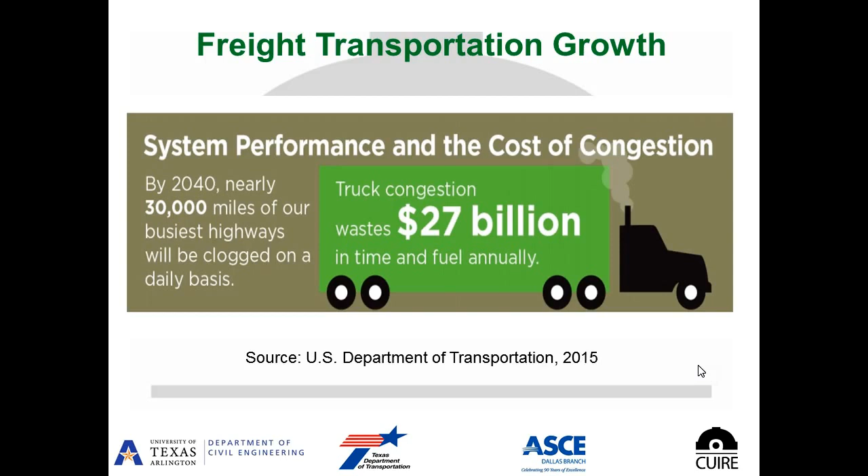Looking at the ports in the US, we have Port of Houston, which is one of the primary ports next to LA and New York. Actually, if you look at the tonnage for the Port of Houston, it exceeds New York and Los Angeles. If you look at the dollar value, Port of Houston is less than the other two. But in any case, it is one of the major ports in the US, and as you know, the cargo comes from Houston to Dallas, and also to Mexico through Highway 35 to the border.

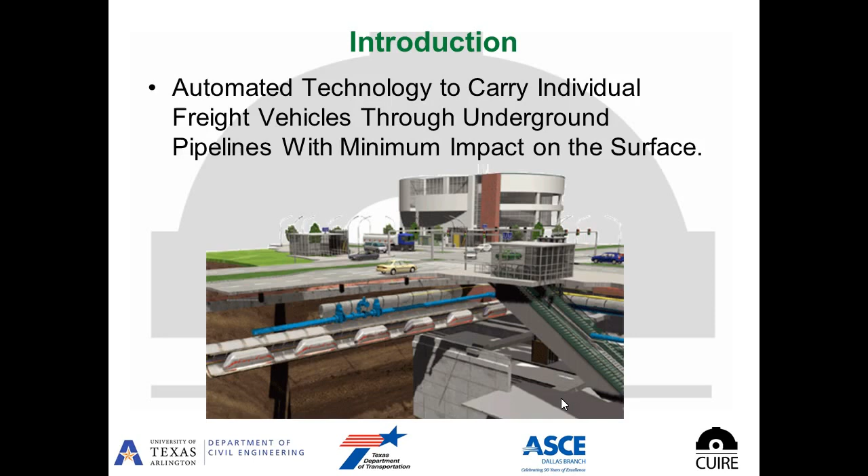So when we talk about underground freight, we are looking at individual vehicles that are automated. They go from intermodal terminals underground, and they ship the freight without any surface disruptions or producing any type of negative impacts. Looking at the intermodal nature of UFT, cargo coming through ports possibly goes through 18-wheeler trucks or maybe train, and then goes inside the city and is distributed by smaller trucks.

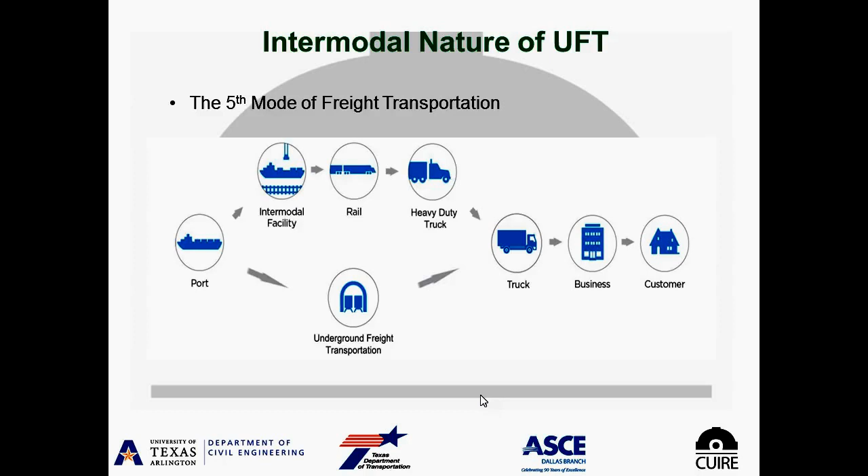What we are proposing is coming from the port, going to underground freight transportation. So we want to reduce as much as possible the 18-wheelers on the highways, and then bring it to the terminals at the cities and distribute it by smaller trucks. This way, it has benefits to the drivers as well. They don't have to be away from their families for a week or 10 days. And on the other hand, we reduce the accidents and other negative impacts of truck delivery.

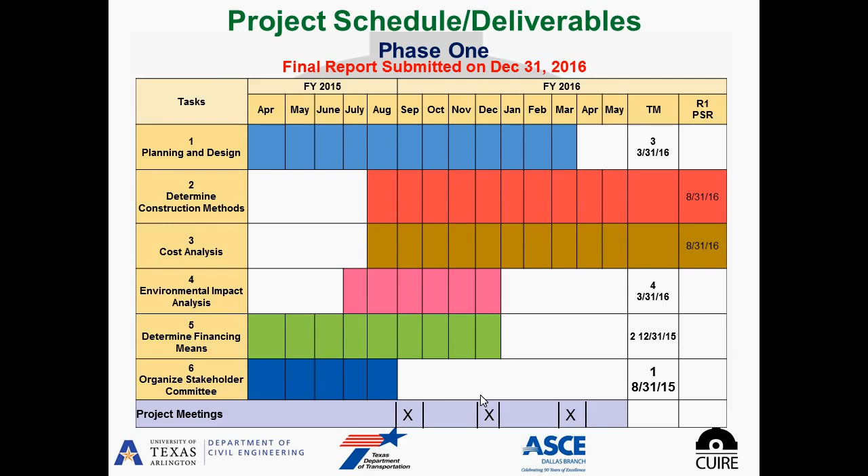So again, looking at UFT design, what we came up with after our research was a tunnel or pipeline, with two tracks, such as railroads, and driverless vehicles that can be three sizes for pallets, containers, and crates. And as you can see, the propulsion system is linear induction motors at the bottom, which is very efficient and uses electricity to move these vehicles.

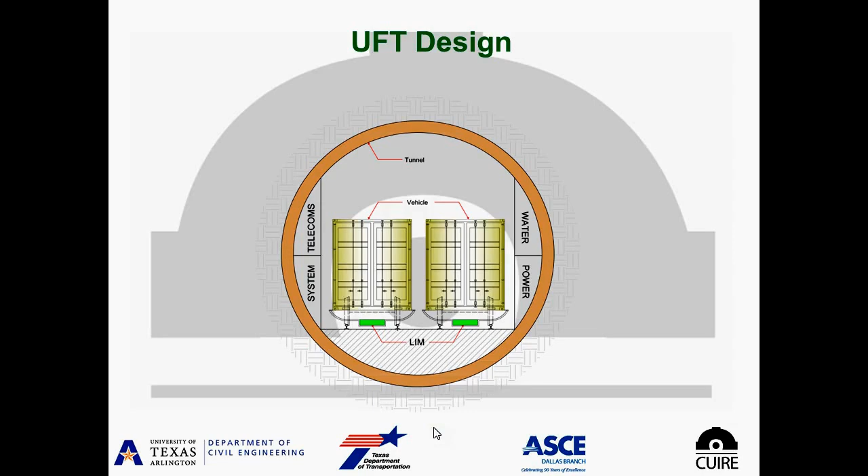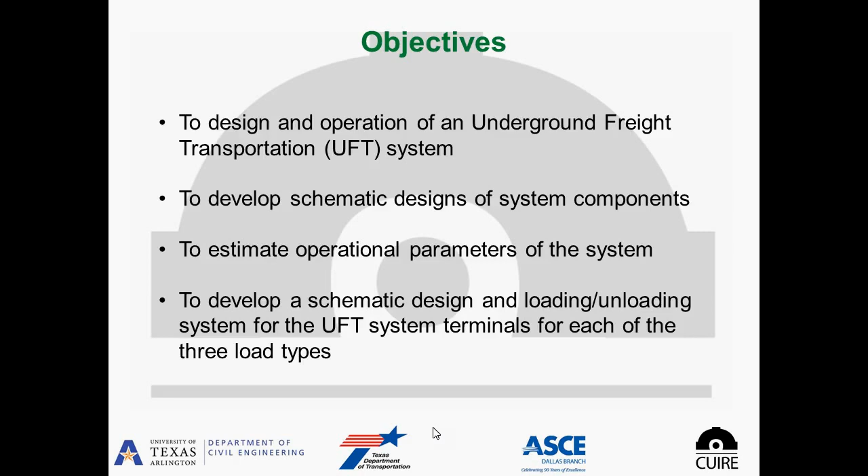So our task one was planning and design. The objective was to come up with a schematic of the vehicles and the tunnels or pipelines. We also developed the design equations for the LIM system in order to provide enough propulsion for the vehicles. So basically we did operational parameters. We calculated the headway capacities, the loads, and the power system requirements. We actually consulted with a LIM engineer in California who helped us do this.

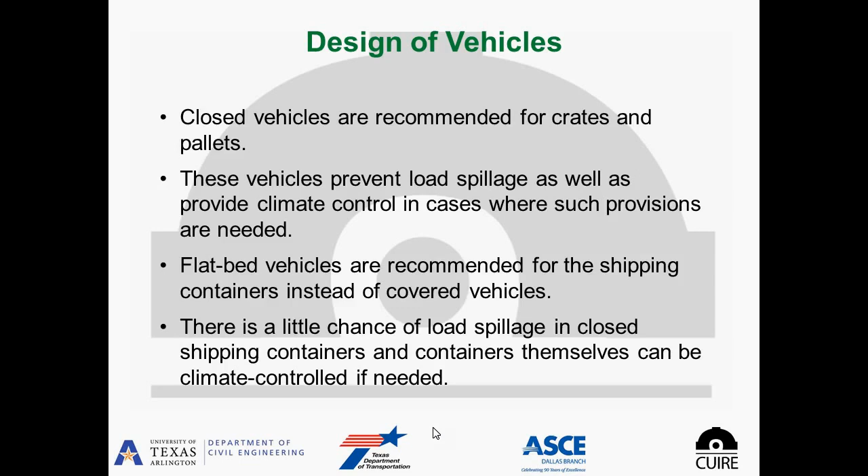So for the design of the vehicles, for crate and pallets we considered capsules. And then for the container size that comes from other countries, we considered just flatbeds or gondolas. So we had two types of vehicles basically, and we considered load spillage and other things for moving the freight.

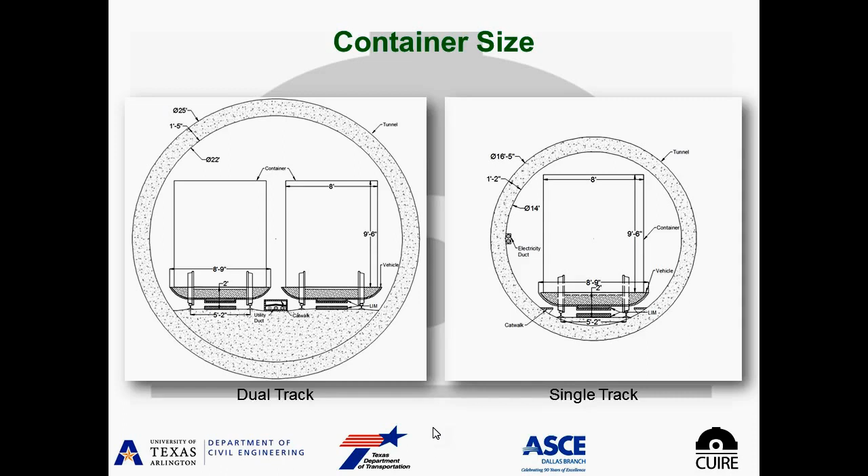As you can see on the slide, on the right-hand side, we considered a single track for two parallel tunnels, and on the left side, we considered dual track. And then we came up with all the measurements and the diameters and the size of the vehicle inside, and then some of the utilities that are required for movement of this freight.

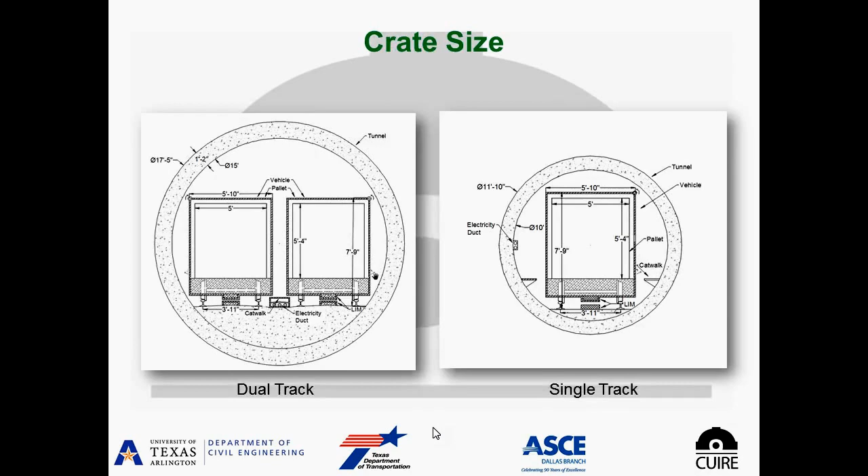So the one I showed you here is the container, or the largest size. Here is the crate, which is the medium size, and again we considered both options. And then the pallet size, which is the smallest size, and again we considered single track and dual track.

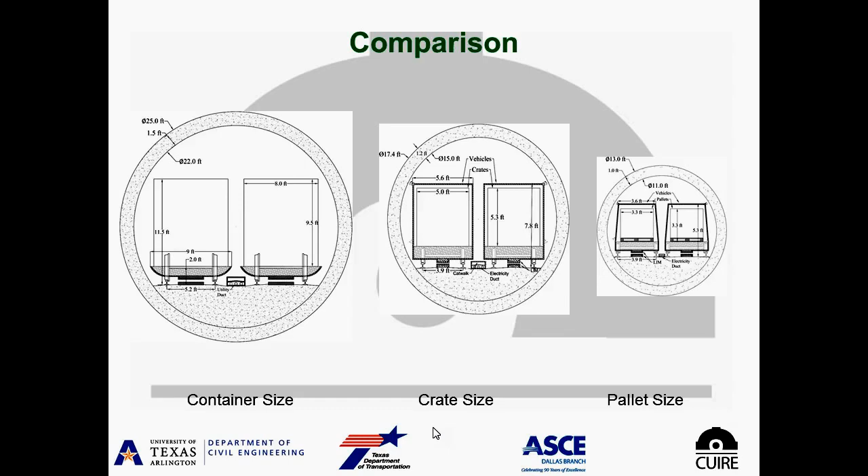Eventually, talking to engineers and contractors, they said if you go dual track for all of them, it would be less costly and more efficient for construction of the tunnel. So for all of them, we considered dual track. So on the right, you can see the pallet, the middle is the crate, and the left is the container size.

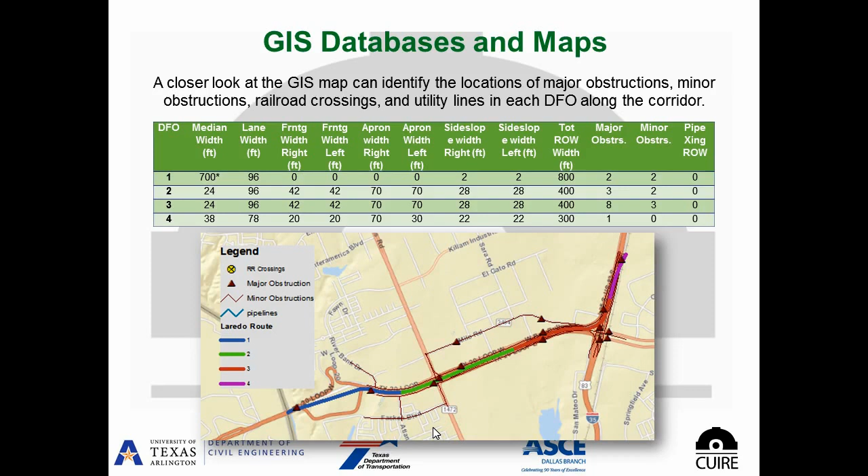We considered the slope. So after talking to the LIM experts, they mentioned that LIM can have a capacity of moving the freight on maybe even a 10%, 15% slope, coming from underground to the terminal. So that's the way we chose, and then we came up with a design for the terminal.

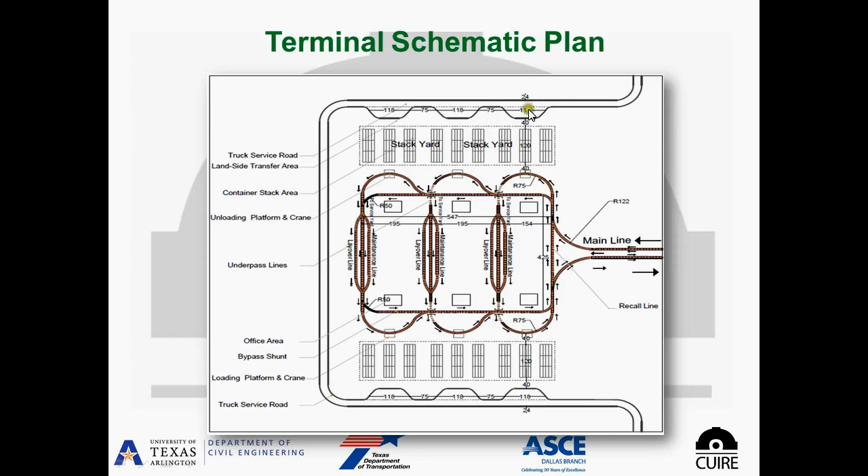As you can see, the vehicles come from the tracks underground, and then come to the terminal, and they can get unloaded, and the freight can be stacked on the side, and eventually the trucks come and pick them up for distribution.

So the results for this task, which is planning and design, are given here, and we considered for Houston to Dallas around 3,000 containers each way can be shipped. And then for the crate and pallet, around 4,300 vehicles can ship the freight.

And then, of course, we need to have a number of forklifts and handlers at the terminals. And you can see the weights, like the container is 34 tons, the crate is 3.5, and the pallet is 2.3.

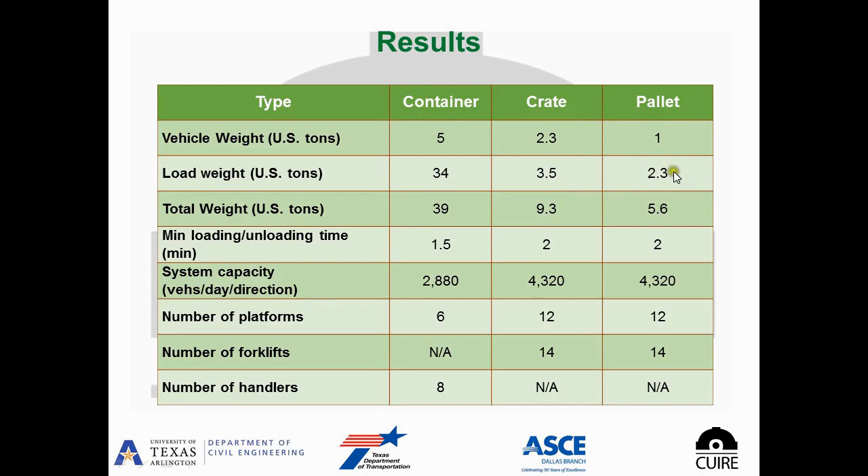So the summary for this task: we considered 3 sizes. Also, we considered a route from Port of Houston to a satellite station outside of the city in Baytown. That was one of the routes we considered. And then another one was the border with Mexico at Laredo. As you know, it is very congested. So we thought maybe the crossing can go through the underground freight.

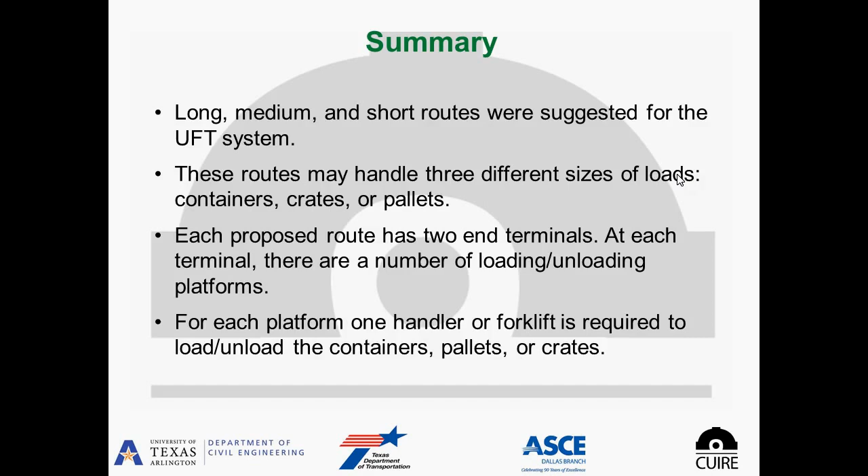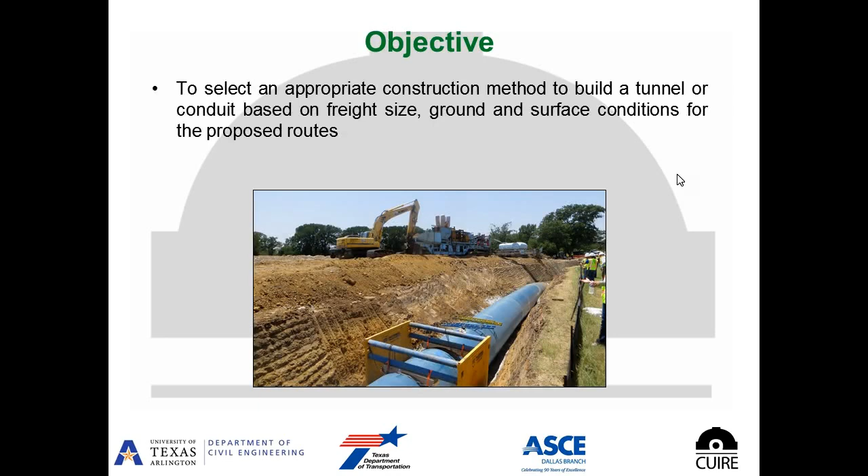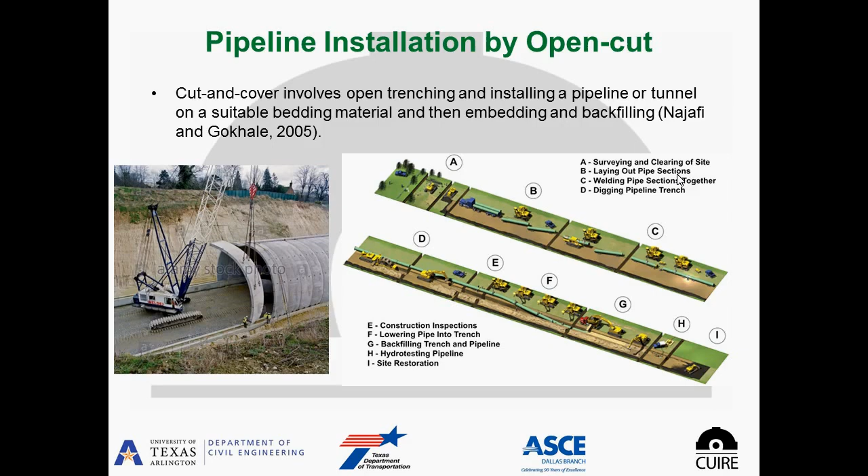So for the construction, we considered open cut or cut and cover, and using pipelines. And also we considered different modes of trenchless and building those tunnels underground. For open cut, we considered the depth from the ground surface to be about 5 feet to top of the pipe, so it's very shallow. But for the tunnel, it is around 50 feet deep.

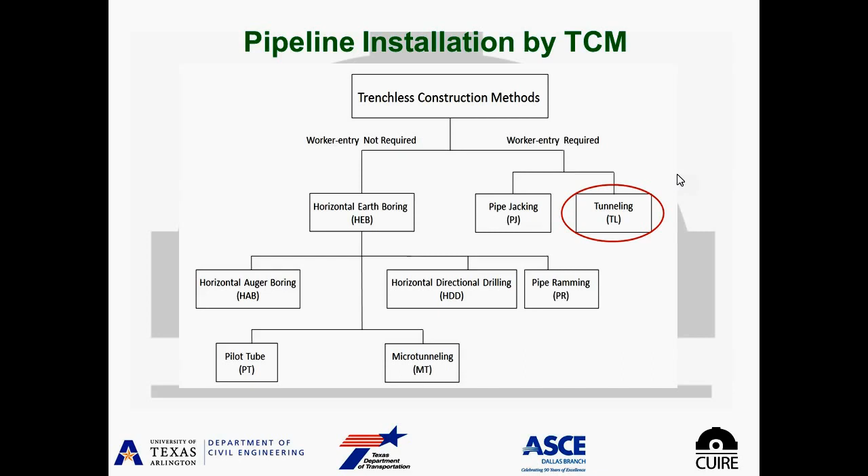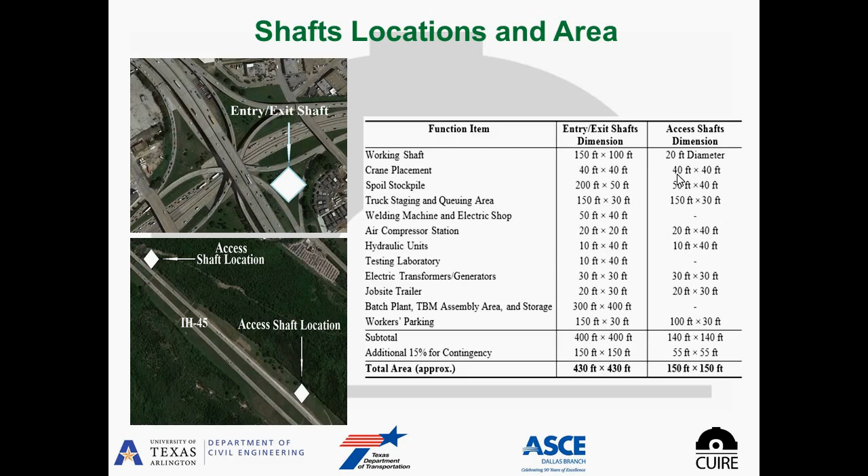As you can see, there are a number of construction methods, and we looked at trenchless technologies and tunneling for the areas where open cut may not be possible. So for tunneling, we considered shaft locations, shaft area, and other factors. As you can see over here, every 1 mile we have an access shaft for the UFT, and then for building the tunnel, maybe about every 10 miles, we have an entry exit shaft for the tunnel construction.

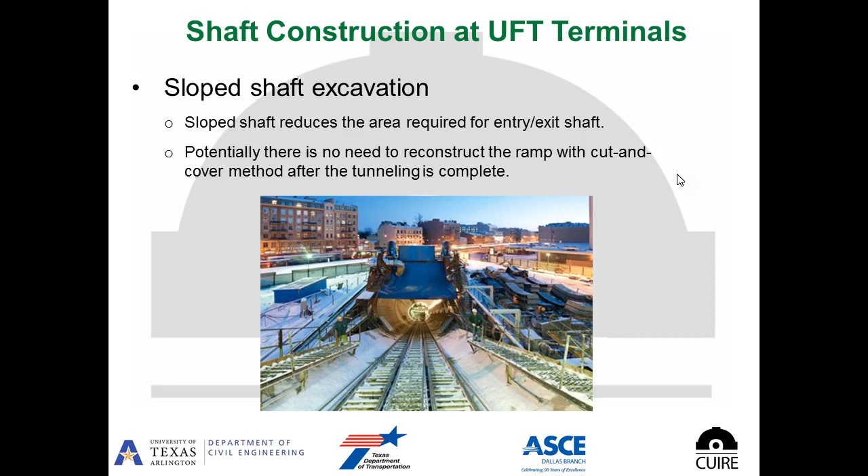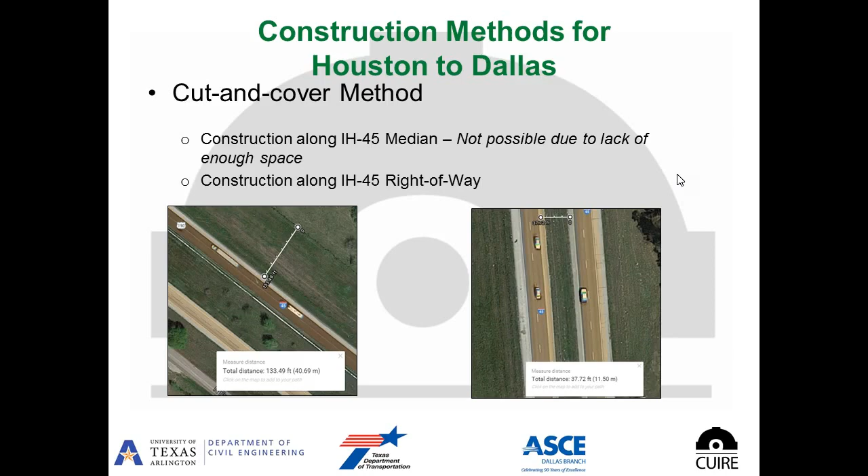We also considered building the shaft sloped like this. That has been done in some other countries, so that is another possibility. We looked at different wall supports for the shaft, so we went into a lot of details. We looked at Highway 45, we looked at the maps and saw where open cut is possible and where we need to do tunneling.

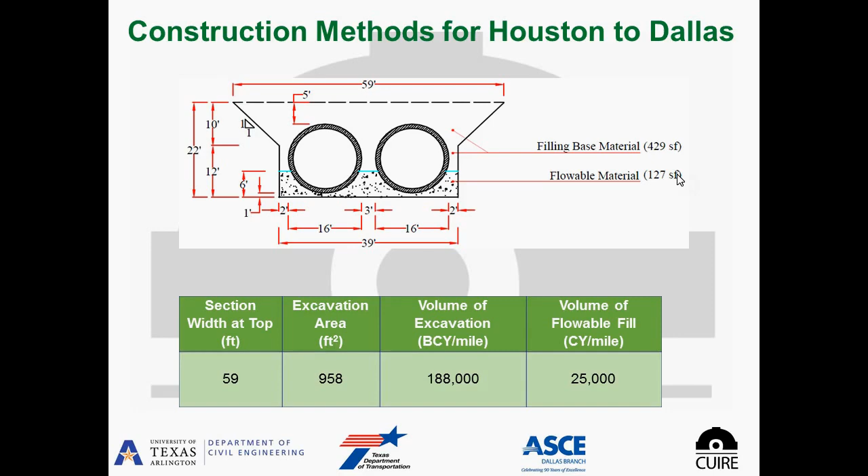So for open cut, we considered putting 2 precast concrete pipes like this, and having the trench sloped for safety. And then we talked to Forterra about building those pipes at the site, so we reduced the transportation.

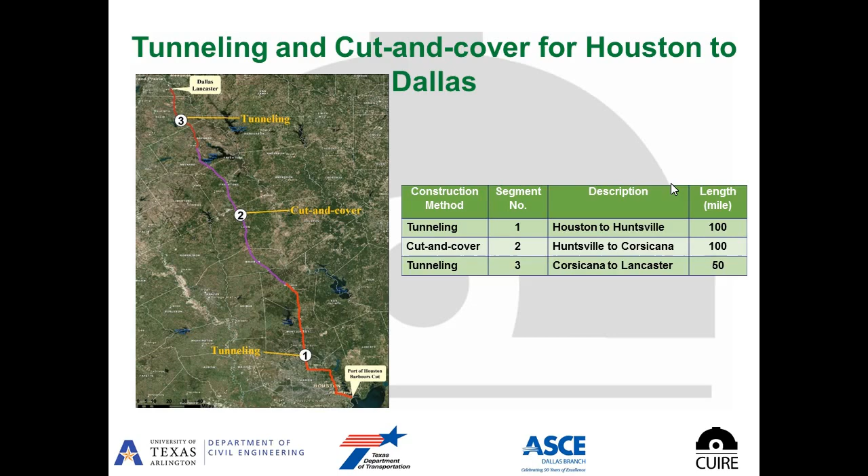So as you can see, for Houston to Dallas, we have 100 miles of open cut or cut and cover, and then 150 miles of tunneling. So from Port of Houston, we'll be tunneling up to Huntsville, and then when we get near Dallas, about 50 miles to Dallas, we get tunneling as well. So in the middle section, as you can see, Huntsville to Corsicana, we can possibly have open cut.

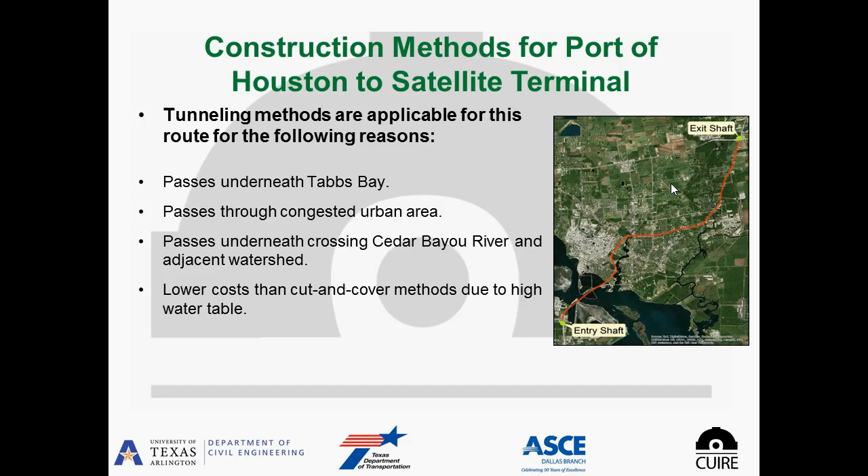For the Laredo border, we couldn't have open cut due to the river and all the congestion on the surface, so we had to pick the tunneling option. And then from Port of Houston to a satellite at Baytown, we had to do tunneling because of the urban areas in Houston. So again, these are some of the assumptions we made for the construction for open cut and tunneling.

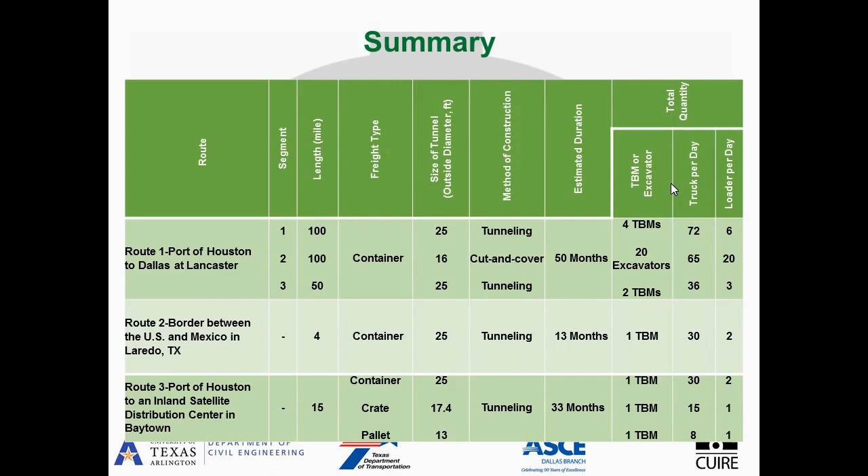And then eventually for the summary, you can see that we even came up with the number of TBMs, tunnel boring machines, number of excavators, and number of contractors. Maybe each contractor can do 25 miles or something like that. For the cost, we looked at all the parameters included in the underground freight.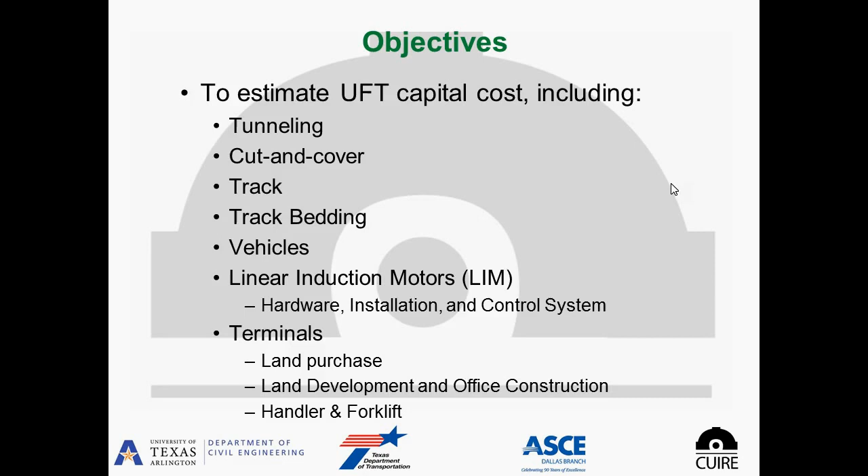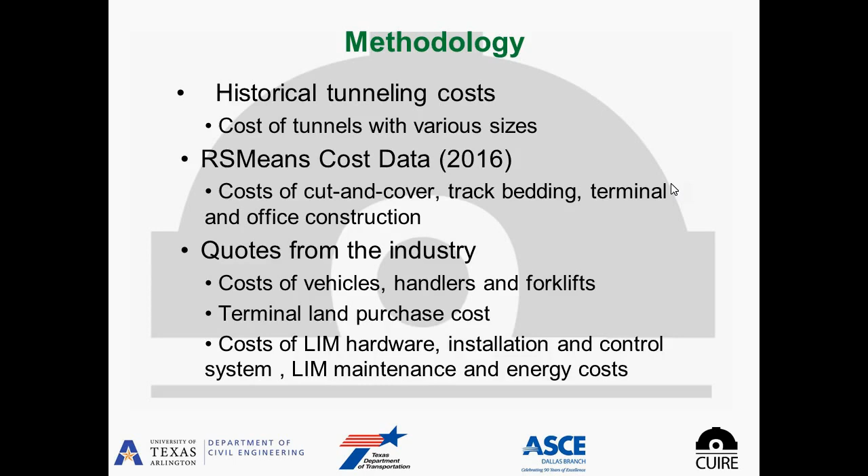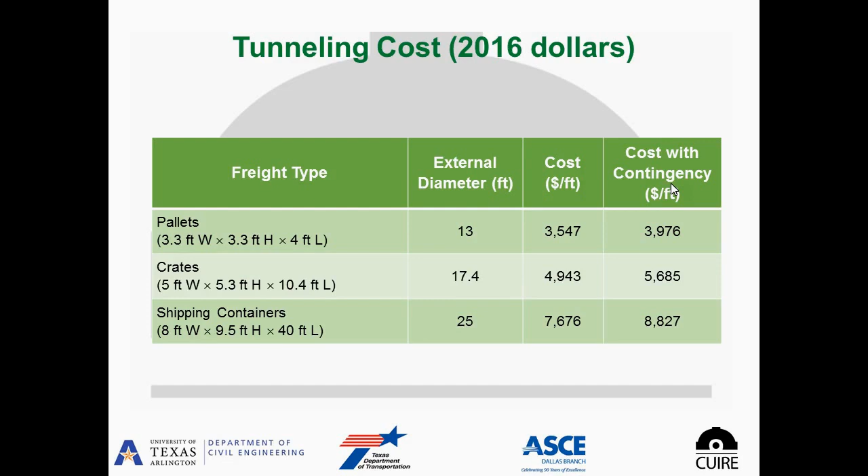Basically terminals, vehicles, LIMs, and energy consumption. So we came up with the life cycle cost of the operation, including the capital cost. We got quotes from industry, we looked at RSMeans cost data, and then for each parameter, like for tunneling, as you can see, for the shipping container we had around $9,000 per foot, the crates about $6,000, and the pallets around $4,000 per foot.

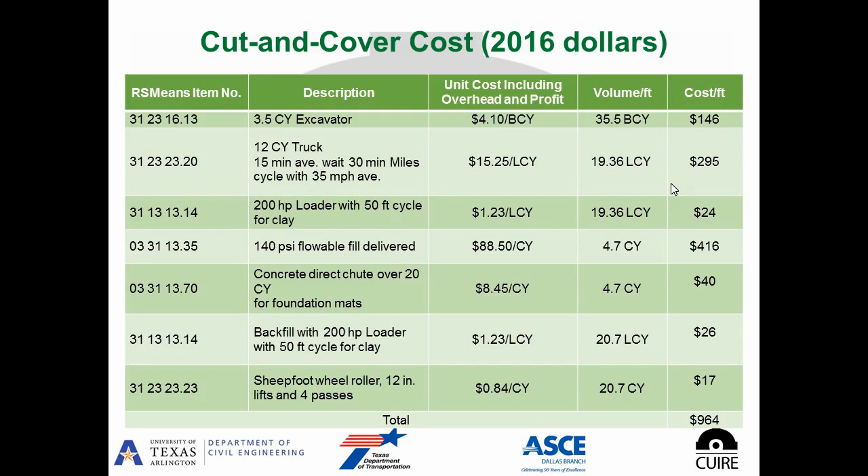And then we also calculated the cut and cover cost to be $1,000 per foot. However, this doesn't include the cost of the pipe. Forterra said the pipe will cost $5,000 per foot, so that's going to be similar to tunneling.

So we considered the cost of the tracks. We are having steel wheels and tracks similar to railroads. And then we have, actually, $1 million per mile in 2016 dollars for the cost of the track. And then we have concrete bedding under the tracks, and we calculated that as well.

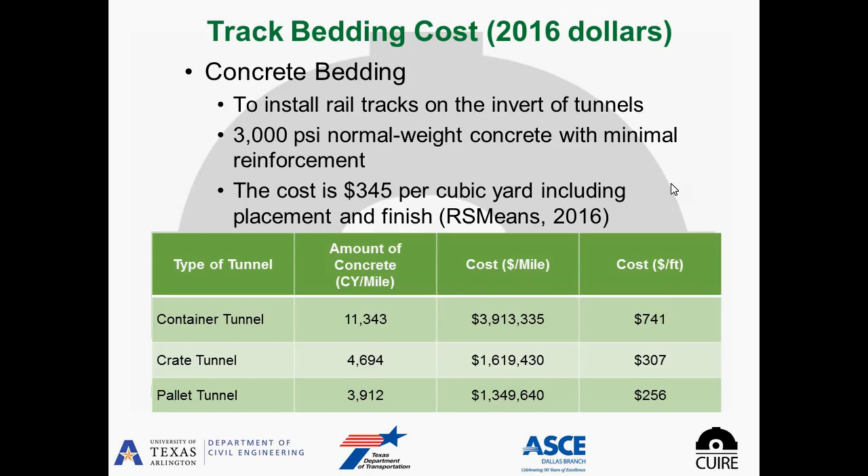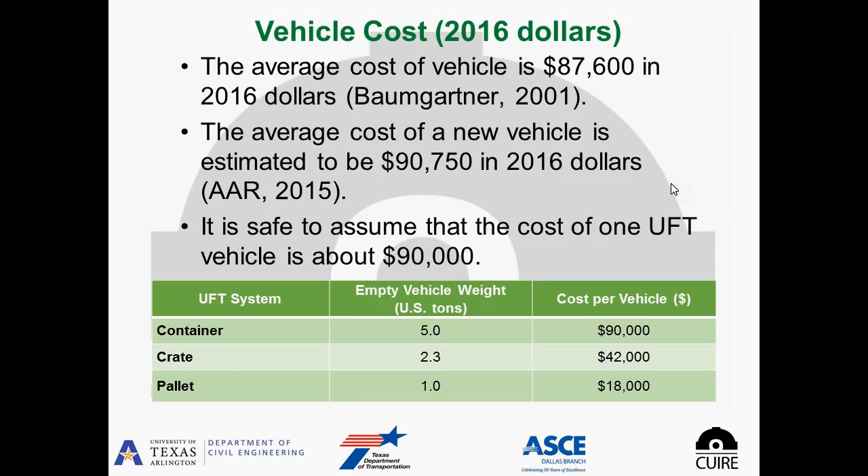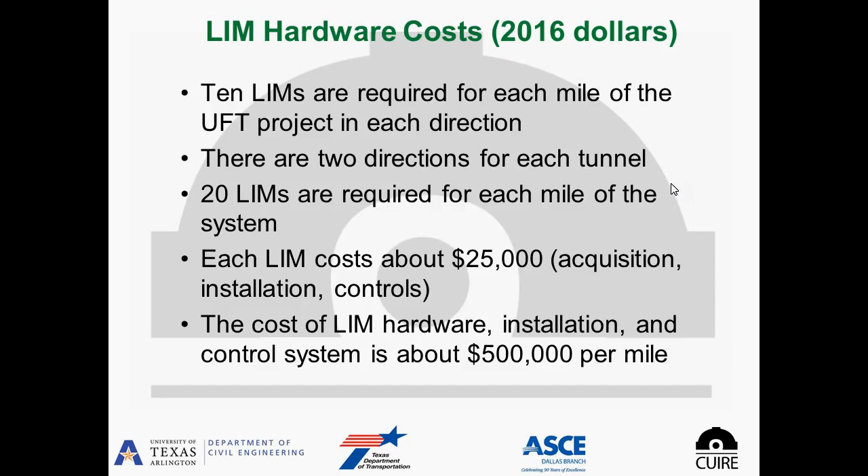And then we calculated the cost of the vehicles for crate, pallet, and container, as you can see on the right-hand side. I'm sorry I have to go through this very fast, but hopefully you can catch more information in the report. And then for the LIMs also, we came up with an estimate of the cost. That was $500,000 per mile. We estimated one LIM every 500 feet, and that would be sufficient even for the container size.

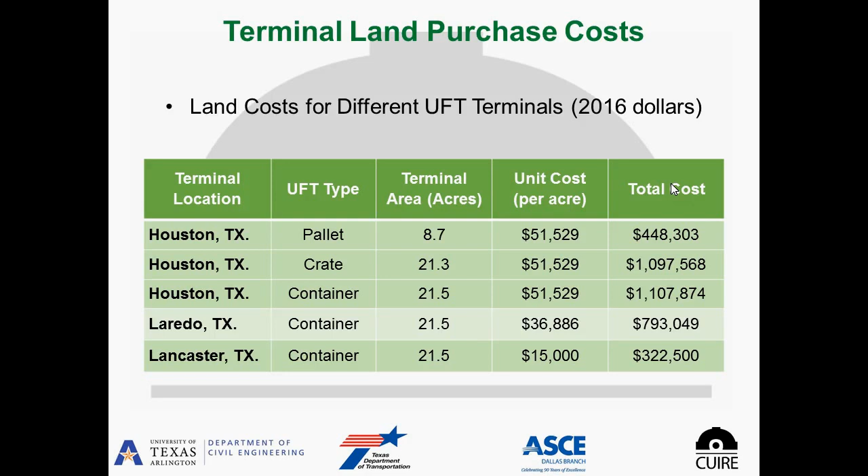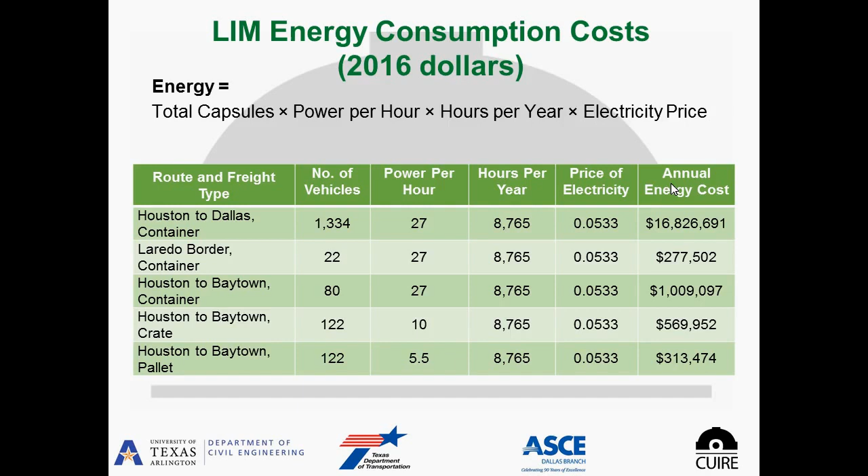So as you can see, the terminal cost is also estimated, and we looked at the land cost for that. And the energy consumption is very efficient, and the LIM is basically maintenance free. And as you can see, the cost of the consumption. And we also looked at the people who work at the terminals, how much their salaries are and how many people, supervisors, operators, inspectors, and we came up with their costs.

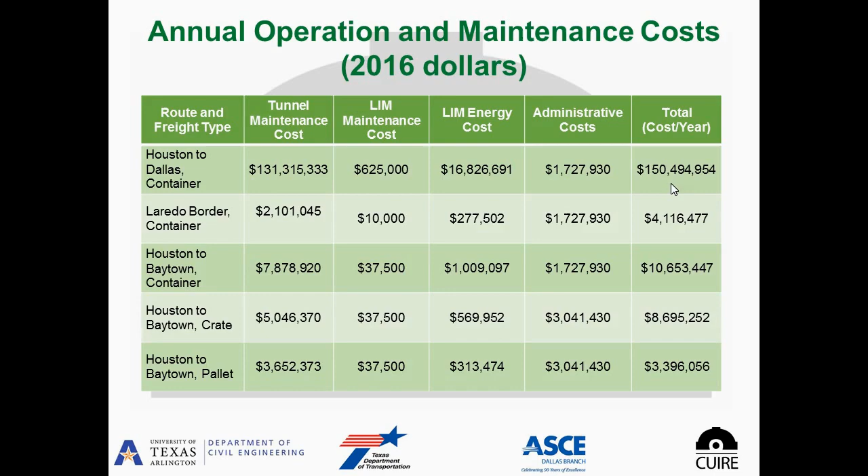And then we came up with the annual operation and maintenance costs. Basically, the LIM and the tunnel do not have that much maintenance. However, some other electronics, computers, and other facilities have maintenance.

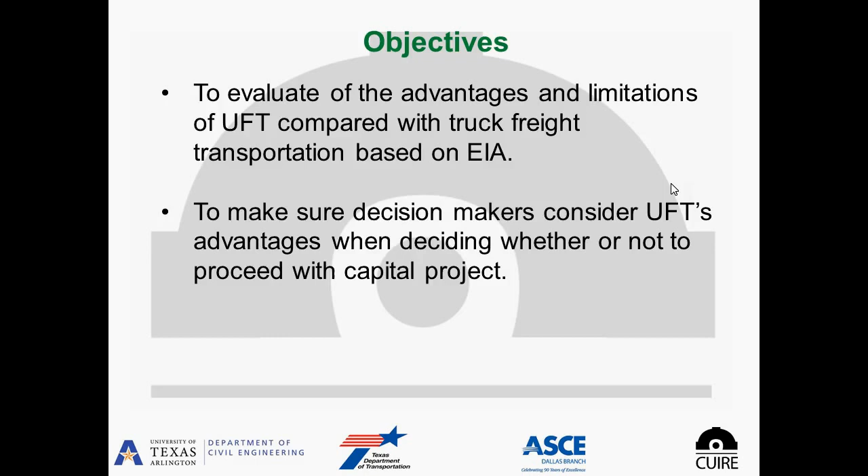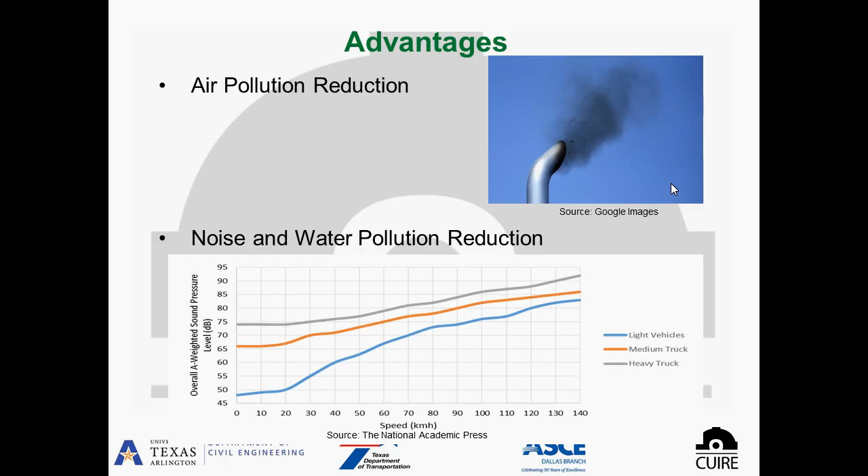We also looked at environmental impacts. So far, the cost was direct cost. We didn't look at the social cost and the environmental impacts. So actually, Amir, who is here today, did this task, and we evaluated the advantages and limitations of UFT. Considering UFT uses electricity, possibly from solar or wind energy, we have very environmentally friendly production of energy. So we don't have much air pollution, we don't have noise and water pollution, and we don't have traffic on the highways.

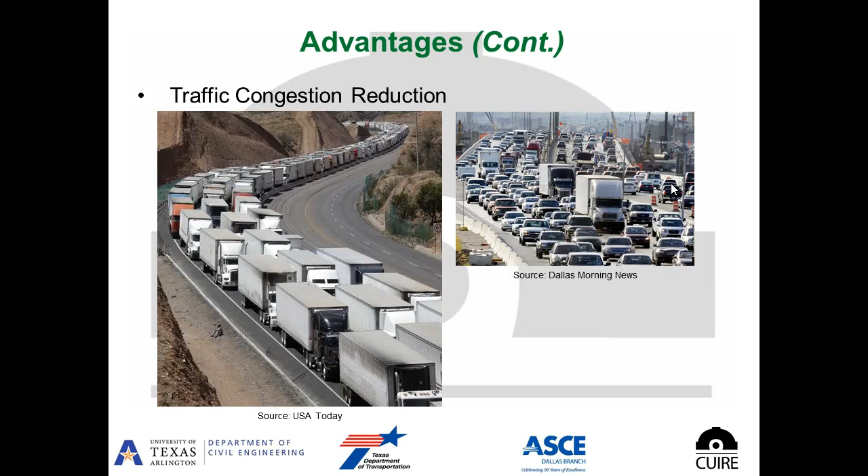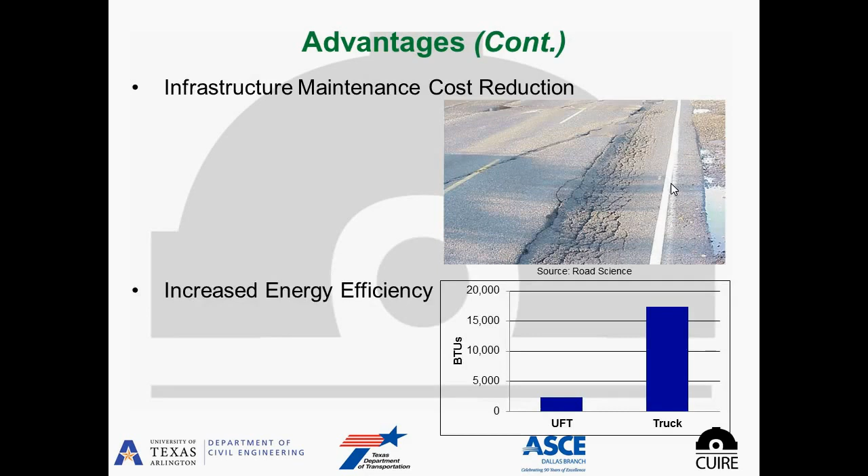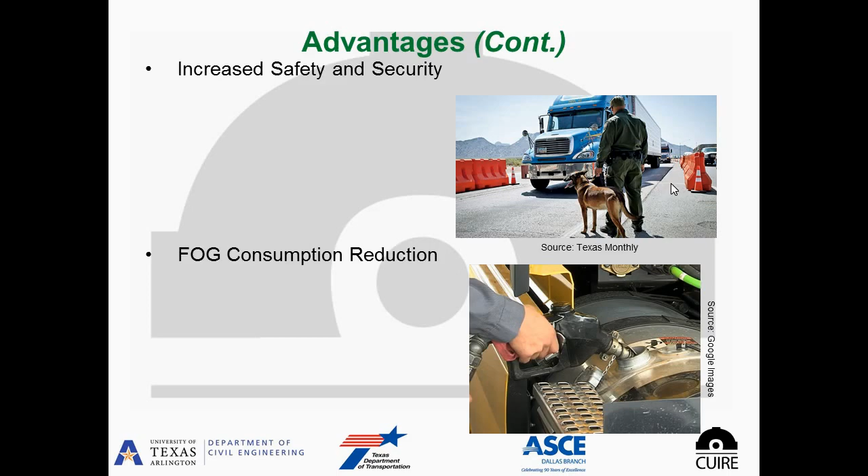You know, the main traffic source and slowdown on the highways are trucks that go about 50 miles per hour when loaded, and then accidents and fatalities, most of them actually caused by trucks, and then damage to pavement and bridges caused by trucks, and security also. Trucks are very easy for people to rob during the night when the drivers are sleeping, or to use for terrorist attacks and other things. And then consumption of fuel and other things need to be considered.

And then you need to have reliable freight transportation no matter what the weather conditions are. Whether it's snow, tornado, ice, or anything like that, we don't have any impacts on underground freight.

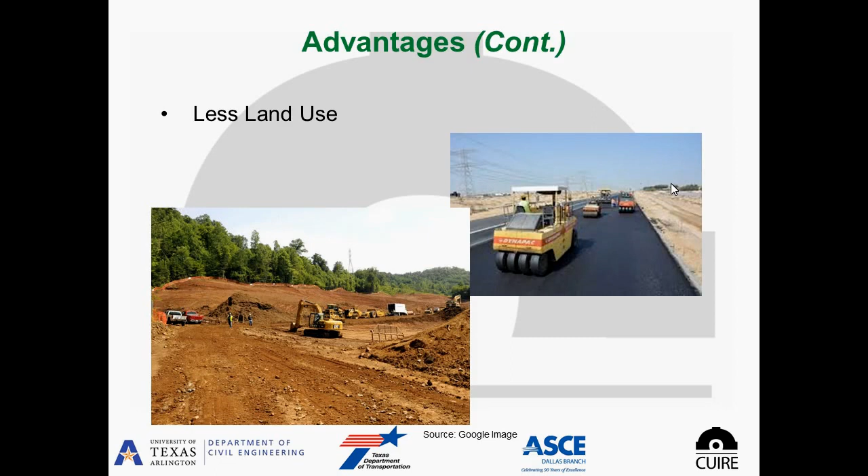And the land use: there is an estimate in the summary I handed out that says for a 200-foot right of way of the highway, you have to use 24 acres of land. And land is a resource. Look at Dallas and Houston. If you drive, you see that most of it has become buildings, become urban. So we need to save the land, and this is one way to do it. And then the operation and maintenance cost is less, and the life cycle cost is less.

Then there are some issues. Some people say the drivers may lose their jobs, or some localities may lose tax revenue, or truck stops may lose their business. There is some switching of business or income with underground freight, but the jobs are more friendly to people and less stressful for the drivers.

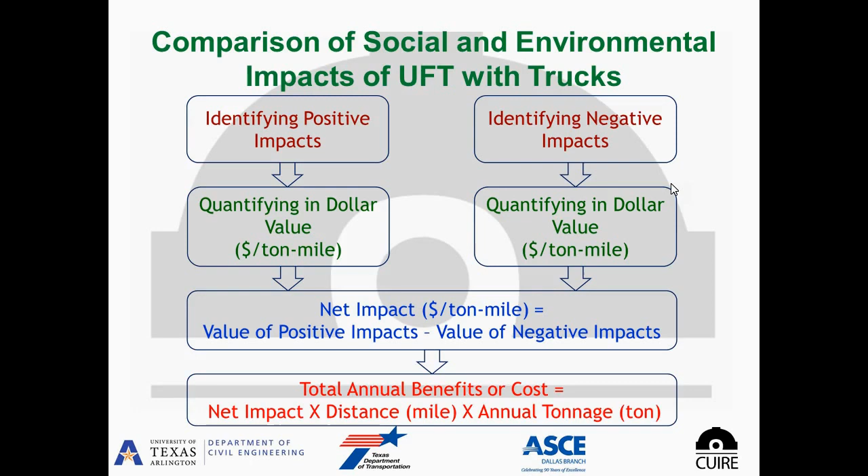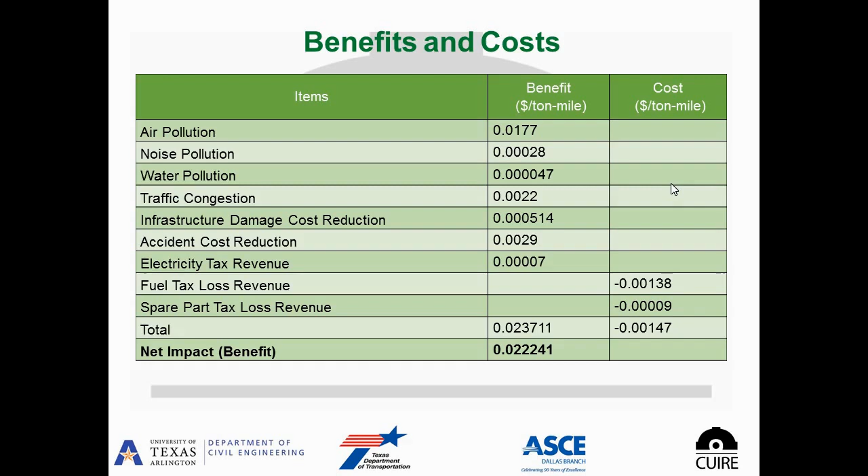So as you can see, it is calculated based on this concept, and we came up with dollars per ton-mile based on this figure. We looked at positive impacts and negative impacts, put a dollar value on each parameter, and the net impact benefit is about 2 cents, at the bottom of the table. And if you consider the annual benefit, for example for 250 miles from Dallas to Houston, it becomes around $400 million per year.

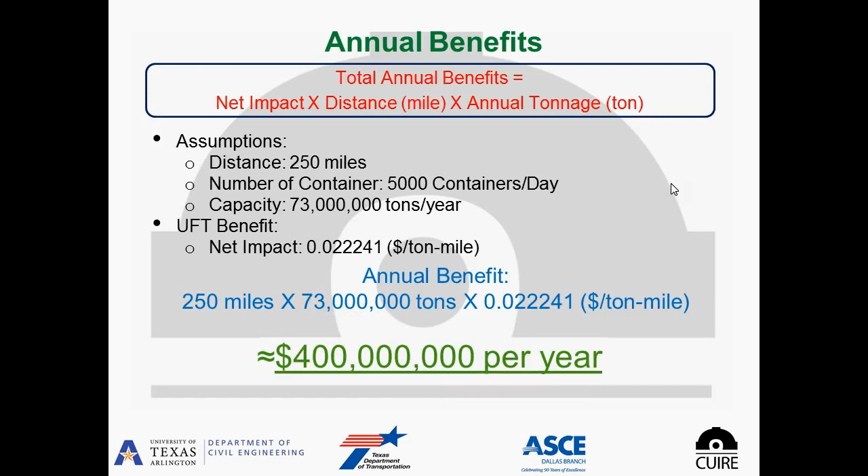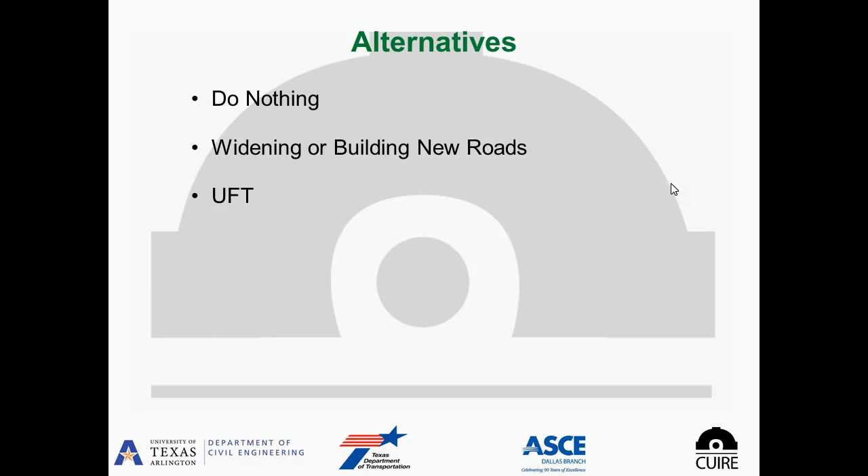That would be the benefit that you need to consider into your life cycle cost. So the alternatives, when you look at the future, 20 years from now, 25 years from now, either you need to expand or widen the highways or build new ones, or you need to do nothing and face the congestion and possible future, or use something similar to UFT.

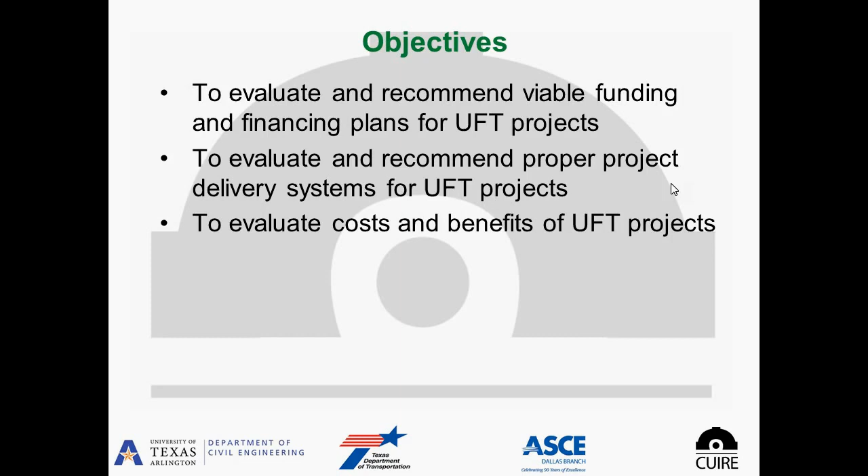So in summary for this task, it reduces social cost, environmental cost. Government agencies may lose some fuel tax and other things, but they may get some other types of income. And then we looked at financial means. We looked at the sources that might be possible, public-private partnerships. To do that, we looked at several highways that were built in Texas.

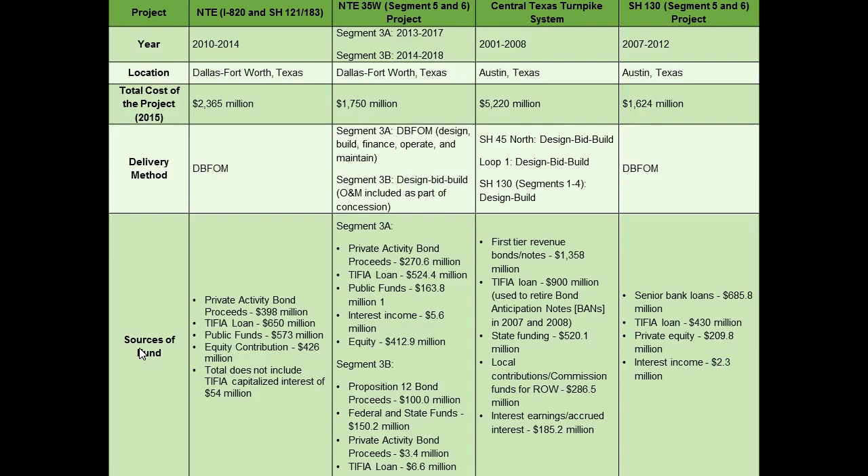And we considered, as you can see on top of the table, the highway. And then on the left side, you see the type of sources of funds. So a mix of private and government funding might be available, and different types of delivery methods, and so it is something that is doable. And then we looked at cash flow analysis, the net present worth, the benefit cost ratio and the rate of return.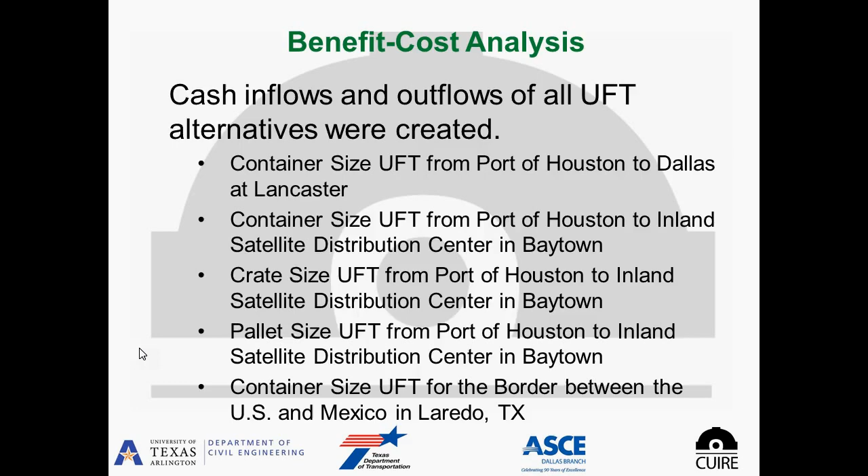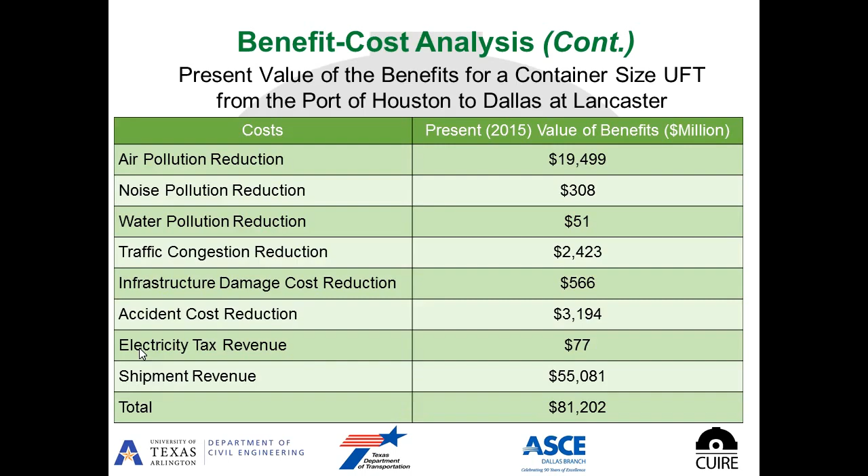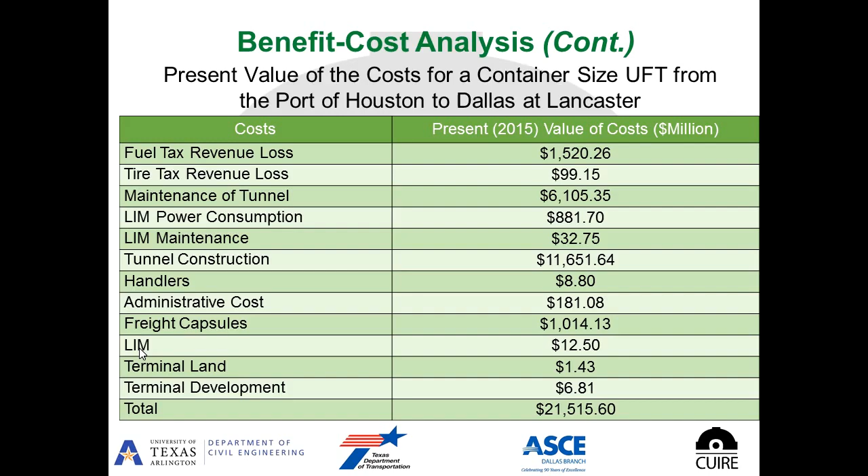And then we looked at all of these for the different 3 routes that I told you about, and also different sizes. So as you can see on this table, we considered the environmental impacts as well in our cost calculation, and also this is the Port of Houston. We considered Lancaster, south of Dallas, to be used for a terminal just before we get to Dallas. So that is the type of cost that is calculated for benefit cost analysis.

And then in summary, you can see the benefit cost ratio here. And it is also in the summary I handed out. And the internal rate of return on the right-hand side, and the net present worth is this column over here. And then also we have it for all sizes and all the routes that we considered.

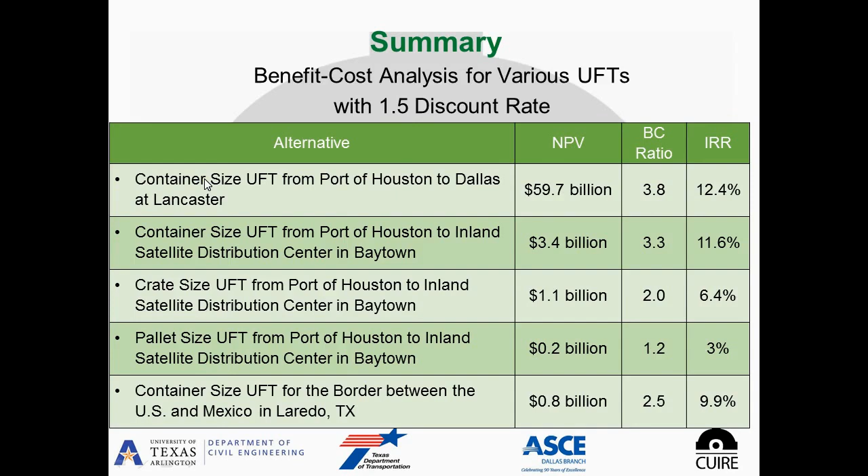And then we went through some type of brainstorming and asked them whether this is a good way to do this or not. And most of them, actually, as you can see, thought the project is needed within the next 25 years. And then some of them thought the short haul distance is preferred. However, in our cost analysis, from Houston to Dallas is more cost effective, actually, than if you go short distances for UFT. So this is something we need to investigate further.

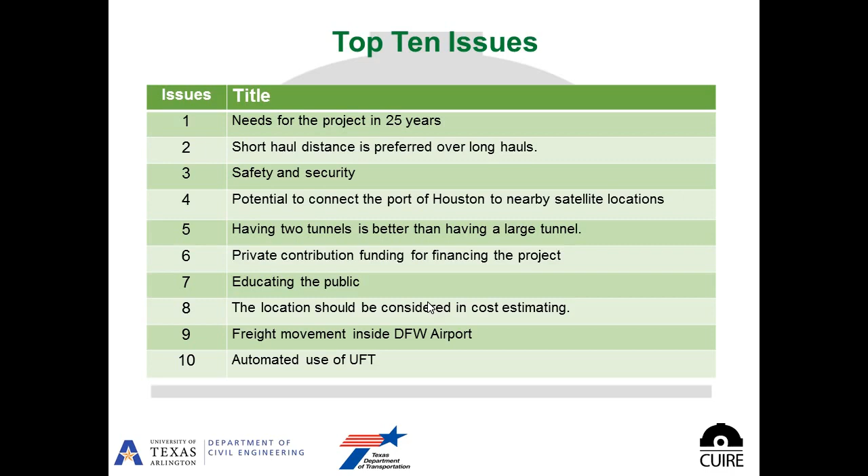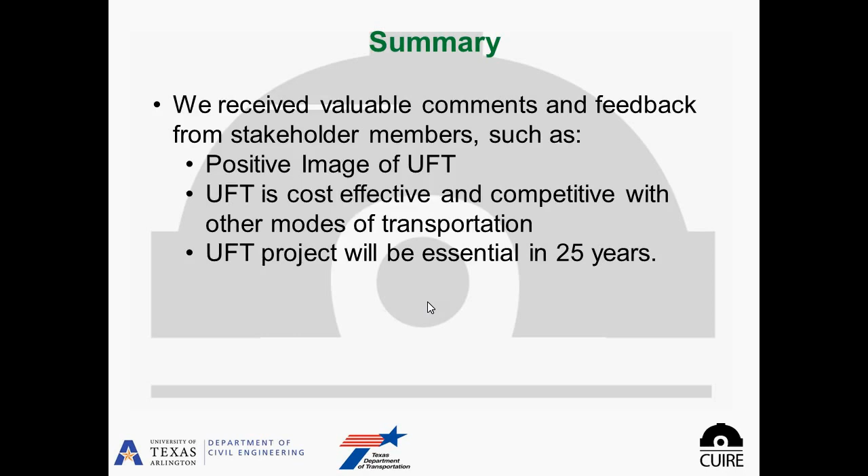And then these are the 10 major issues they came up with in the stakeholder meeting. And overall, the image was very positive, and they were very supportive. And then just to give you a comparison, again, just to conclude, you can see the length of each of those highways, like LBJ Express. It is 3.1 billion total cost, and is about 194 million per mile.

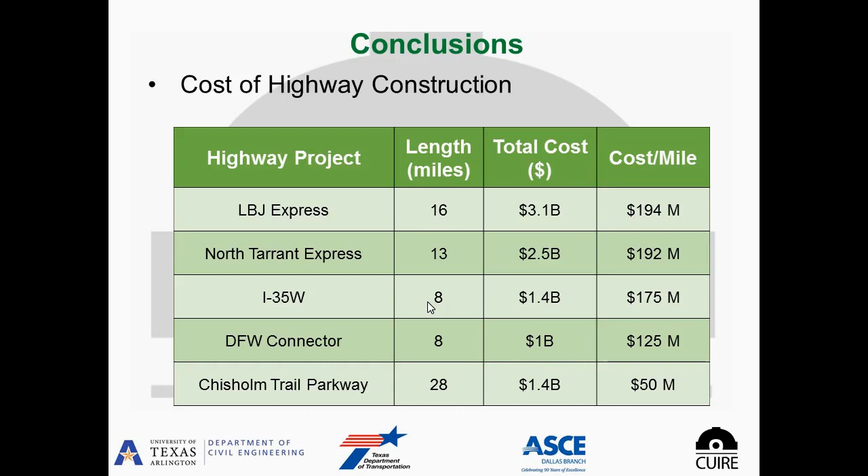So when we started this project, everybody, or maybe some people, were saying it's never going to happen. It's going to cost billions of dollars. But you are already paying for highways, and they cost a similar amount of money. And then highways, every 20 years you have to maintain them. The pavement needs to be resurfaced or redone, and the bridges need to be maintained. You need to consider all of those when you are building highways.

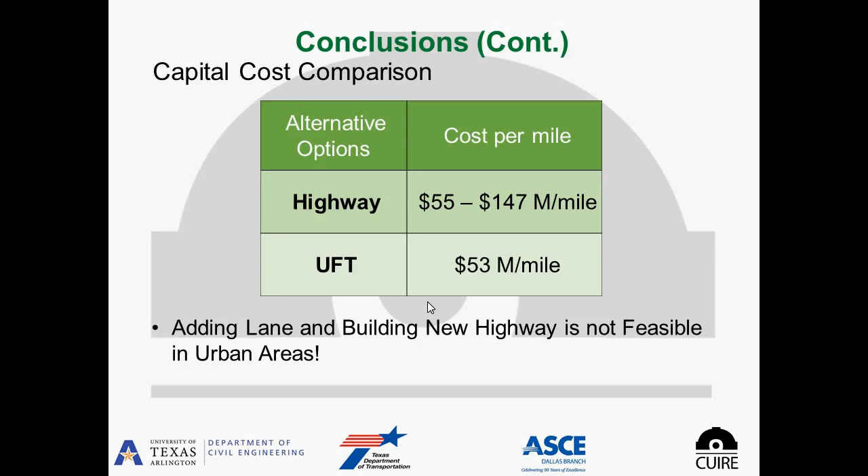And so just to give you a comparison, if you are in urban or rural, maybe rural is less. Highway is about $55 million per mile. In the city, urban is about $147 million per mile. For UFT, it doesn't matter if you go in the city or out of the city. If you do tunneling, it's around $53 million per mile. So it's comparable, it's not out of line. And again, in the urban environment, sometimes there is no more room to build more highways. And then you need to consider the noise and dust and pollution and everything else.

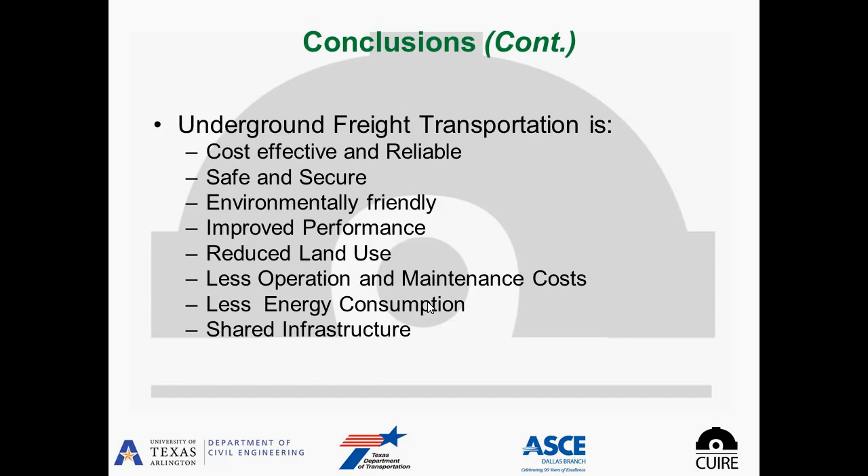So basically, overall, positive results, and we are hopeful to go to phase 2 and phase 3 to do further investigations and also do a pilot project. With that, I would like to show a little animation that tells you how everything works, and then I'll be available to answer questions.

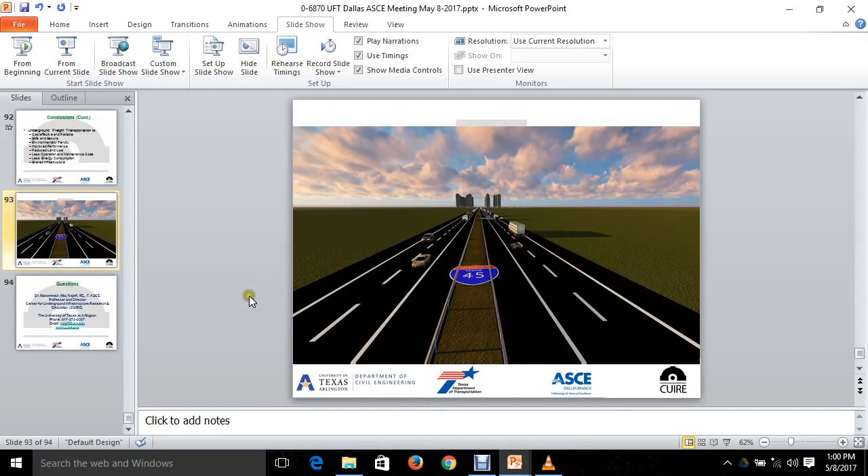So as you can see, the terminal is outside of the city, and the trucks come and pick up the load. And we are not using any more land. We are going under the highway. And technically, it's possible. We talked to tunneling contractors. They were all positive. The soil conditions in Texas are suitable for tunneling.

And also we talked to Bombardier at the airport, and they are also manufacturing LIM. They were very supportive of this type of technology, and everything is doable, it just needs to be further investigated. And with that, I conclude. Any questions?